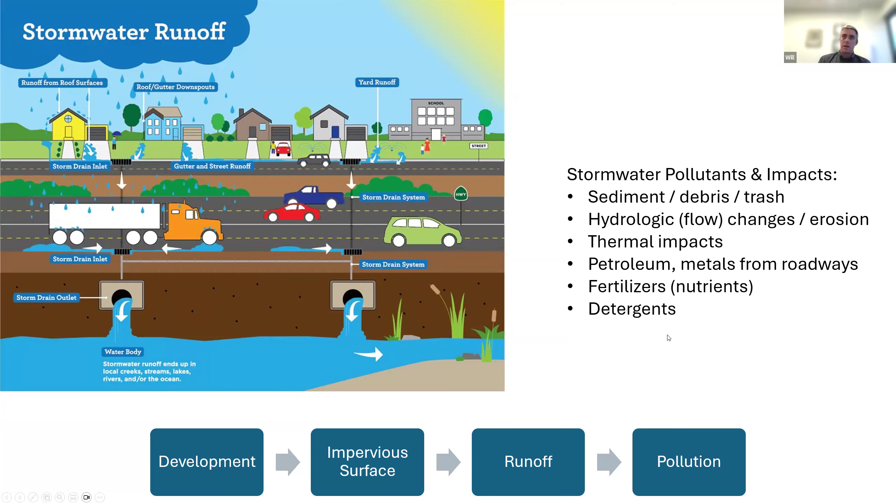So how is stormwater regulated? There's a lot of different ways that we regulate stormwater. So for example, industrial facilities are required to have permits for their stormwater discharges. They have to install things that are called stormwater best management practices, and they have to regularly sample the stormwater that's coming off their site to make sure that it is not polluted and clean enough to go into a stream. Permits are also required for municipal separate storm sewer systems, or MS4s.

We also regulate stormwater through development standards, right? So if you want to build something, a house or an apartment complex, there are standards that say you have to have this much setback from the property line. You have to have this much pervious surface on your lot. So you can't overdevelop and just pave an entire lot.

There are also permits required for earth disturbance activities. So think like grading, or large construction projects. There are things you have to do to keep the sediment, primarily the sediment, from running off the site during construction. And then finally, there's post-construction stormwater management planning. So, what have you engineered in your structure to handle and convey the stormwater to the sewer system in a way that's not going to result in flooding or increased runoff or stormwater pollution. So that's a few examples.

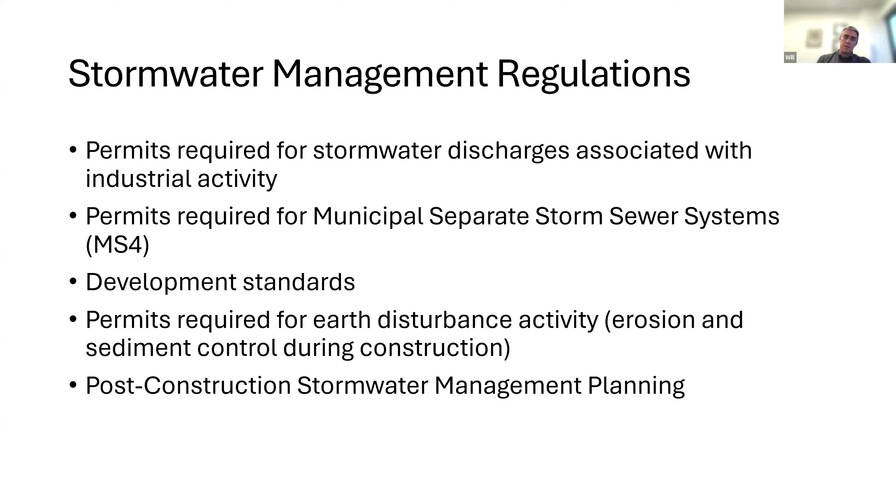At the end of last year, the township updated their stormwater ordinance. And so I wanted to highlight a couple of things that the township has done to try to address the issue of stormwater pollution. So one of the changes in the ordinance is they have lowered the threshold for regulated impervious areas from 1,000 square feet to 500 square feet. So what that means is if you are proposing a new deck or a new driveway or a new addition on your home, if it's over 500 square feet, then that is now going to trigger the stormwater management planning and review process with the township engineer.

And we're going to have another workshop next week on Tuesday where we are going to talk in more detail about that process. It sounds complicated, but there are some easier ways to go through that process that we'll talk about.

Another change in the ordinance is that threshold that triggers plan review is now cumulative, going back to February of 2005. So it used to be the case, it was kind of this weird loophole situation where you could add 900 square feet each year, but as long as you didn't trigger that 1,000 square foot threshold, you would never trigger any kind of stormwater management planning or review. So you could kind of keep incrementally adding impervious area to your property. And that's been addressed in the ordinance update.

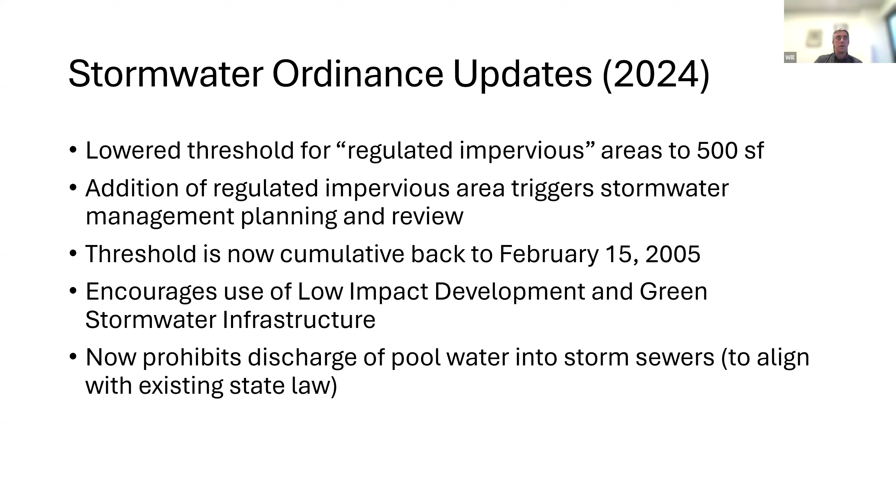So now we'll get into things that you can do at home to help the issue, right? So the first strategy that you want to think about is reducing the impervious surface at your property. And this will also help you. Me and my wife, we're planning on putting a sunroom on our house. It's an older home where there's not a lot of impervious area left on our property to develop. So some of these strategies I'm looking at to try to get some of that impervious surface back, right? So potentially we could have a slightly larger sunroom in the future, hopefully.

So one thing that is out there now that you can use are permeable pavers, right? So this is a pavement system that is engineered to allow rainwater to infiltrate through the cracks. You can see there's little gaps between the pavers, and the sub base there, the pea gravel and the crushed stone, is designed to allow that water to infiltrate into the soil. Otherwise, it would just run straight off the driveway out into the street and into the storm sewer system. There's a lot of different designs that are available. The upfront installation costs can be a little high, but they do last a good bit of time.

So if you're looking at your driveway and you think maybe it's coming up on replacement, or it might need to be replaced soon, or sidewalks or patios at your house, this is something that you should consider, because it would significantly reduce the runoff coming off of your home. And if you want to make sure that the pavement system that you're looking at is not going to count as impervious area when the township looks at your plan, you should work with the township engineer to make sure you're ordering the right stuff and it's being designed and installed in a way that is going to give you credit for that, right? That this should all be treated as pervious area, not impervious area.

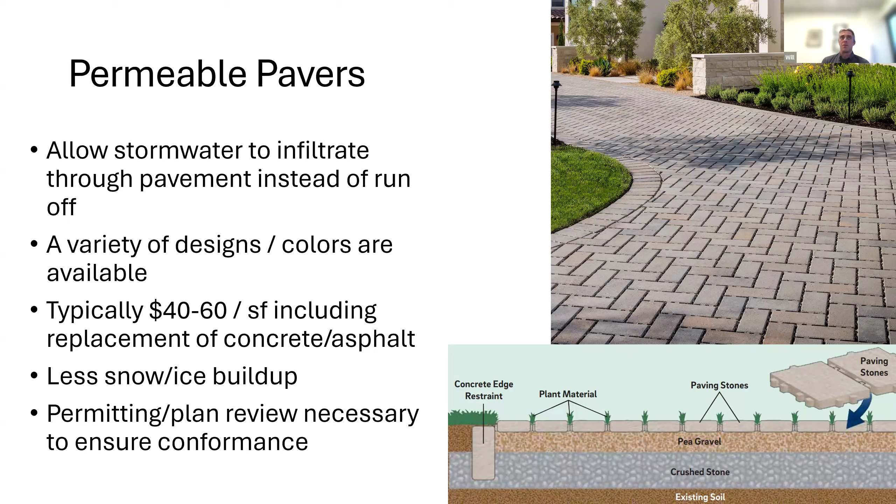There's also permeable pavement out there, porous concrete and porous asphalt. This is a little bit cheaper than the paver systems that we just looked at, but it requires some more maintenance. They're a little bit more susceptible to the freeze-thaw cycles, and you generally don't want to put road salt on these because it can tend to clog up the pore spacing.

So I've seen mixed success with this stuff. If you take care of it and you keep it clean, then it works great, and it will continue to work great long into the future. But if you have a lot of leaf clutter and debris and stuff that falls on your driveway or on your pavement, maybe not the best choice. Although it is cheaper to install than the permeable pavers, generally.

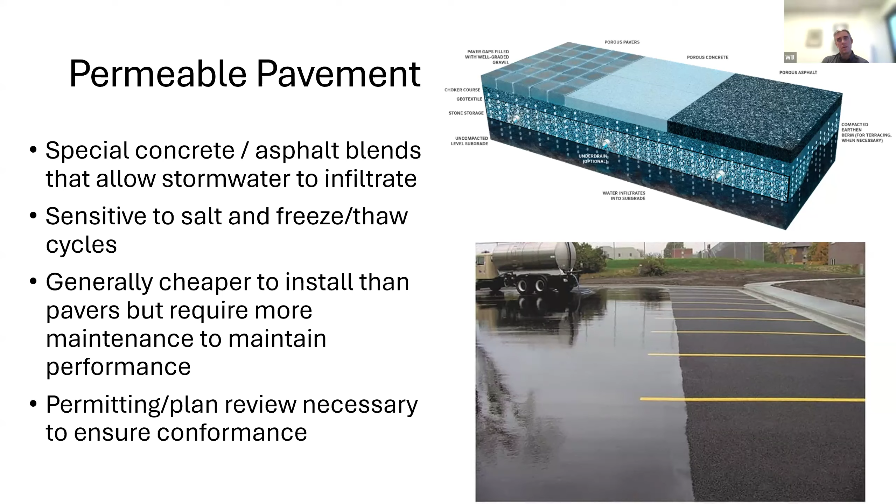Downspout disconnection. So this is something that is actually a requirement in the stormwater ordinance now, but we know a lot of homes have their downspouts directly connected to the sewer system. When I bought my home a couple years ago, all the downspouts were connected. So one of the first things I did was disconnect those. You just get one of those flexible plastic tubes at Home Depot or whatever, and send the water into the grass or a place where it can just soak into the ground.

They're not allowed to be connected to the standpipes, and they're not allowed to discharge directly to the street either. So they should be disconnected. Although if you have a smaller lot, or this isn't really feasible for whatever reason on your property, the township will allow exceptions on a case-by-case basis. Going back to the downspouts, this is a really simple and easy way to significantly reduce the runoff from your property, because the roof is a pretty significant portion of the impervious area on your lot. And this is really cheap to do.

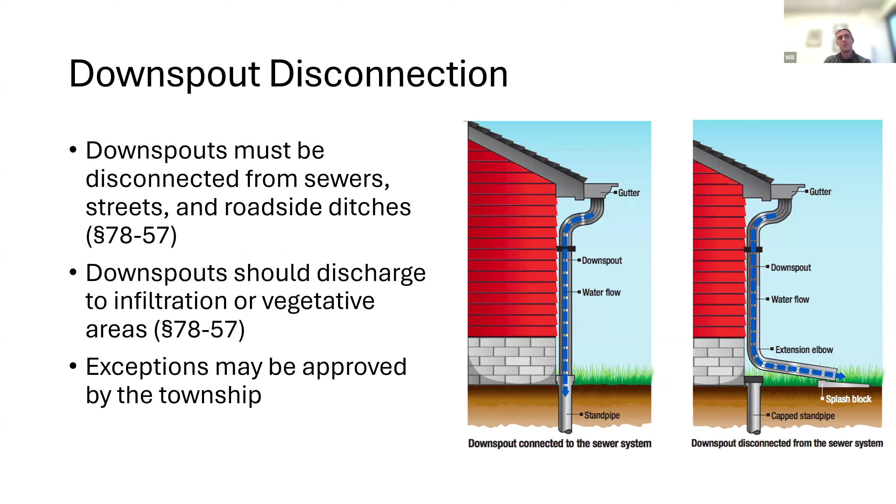Depaving, right? So at my house, we have an asphalt driveway, and we have these concrete sidewalks and walkways that go around in our backyard. I'm not really sure why they're there or who put them there, but it's something that I'm looking at getting rid of. Again, I'm trying to reduce the impervious area on my lot, not only for stormwater pollution reasons, but also because it may allow us to have a sunroom in the future.

So I've seen these ribbon driveways in my neighborhood. I think they look really nice, and you could do that in conjunction with a permeable paver system. But that little strip in the center there, that's a couple hundred square feet that you can reclaim. Again, sidewalks, do you really need them? Are they too wide? Same thing with patios.

Another example at my house is we have a deck, but underneath the deck is concrete pavement, right? So I'm not sure why that concrete is there, but that means whatever water falls through the deck just goes onto the concrete and runs into my driveway. So these are just things that I've noticed that I'm looking at ripping up and getting rid of. And all that square footage can add up pretty quickly.

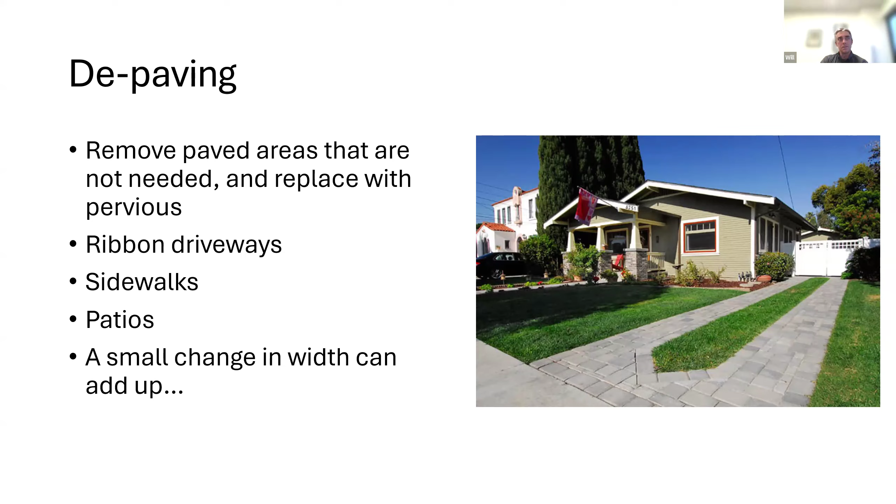The other method that we have, in addition to just reducing impervious areas, is capturing or at least slowing down that stormwater, right? Because we talked about that first flush, that really quick, rapid flow of water. That's where 90% or more of the stormwater pollution comes from, in the first 30 minutes or first hour of the rainstorm. So if you can contain some of that water and do something with it, or at least slow it down, that can have a big impact as well.

So here's some methods that you could do at home. You could get rain barrels, right? These are connected to your downspouts, and they're very simple, very cheap to install. And now you have a barrel of water there that you can use for watering your garden or cleaning your patio or whatever you want. They do require a little bit of maintenance. You want to keep leaves and other stuff from accumulating in there. You want to keep them empty, obviously, because if they're full, they're not going to hold any additional stormwater when the next rainstorm comes.

But if you're interested in this, we're having a rain barrel workshop on June 17th at 6 p.m. at the CREC. And the first 25 people that sign up for that will get a subsidized rain barrel for their home. And we're going to teach you all about how to install and maintain them at that workshop.

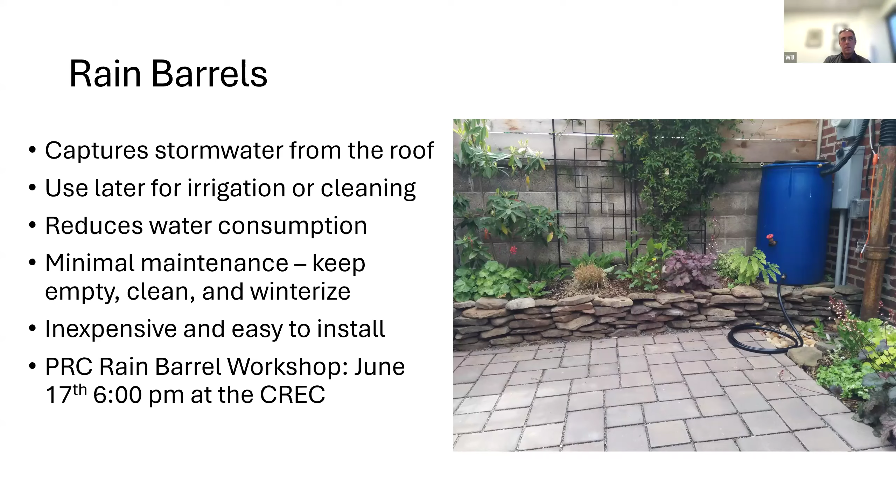Downspout planter. So this is similar to a rain barrel, except it's got an underflow and overflow drain in it and a little bit of soil and drainage layer at the bottom. And you can just grow your flowers or whatever you want in there. It's just a nice little piece.

You generally want to use native, perennial and drought tolerant plants. That would be the easiest to maintain. They can just kind of live in there with the periodic stormwater. It doesn't require a lot of work. But the benefit here is that whatever rainwater is captured in there is sort of treated and filtered by the soil and the plant system. And some of it is taken up by the plant and then evaporated and transpired back into the atmosphere, instead of running down your driveway into the sewer.

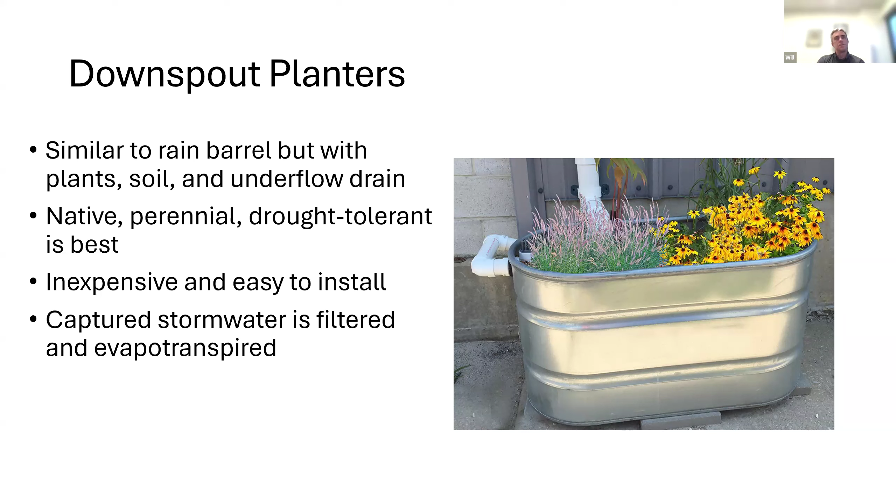Just planting more trees and planting other vegetation helps a lot too, right? Because these plants, as their root systems develop, help to promote a deeper, more rapid infiltration of water into the ground. They also retain a lot of water. Obviously, plants need a lot of water to live, and so they take the water up from the ground and put it back into the air. And all of those things reduce the amount of runoff that's coming off your property.

And mulch and compost are also good ways to help retain some of that moisture on the ground, where it can be used by plants and where it's not just wasted and sent down the drain.

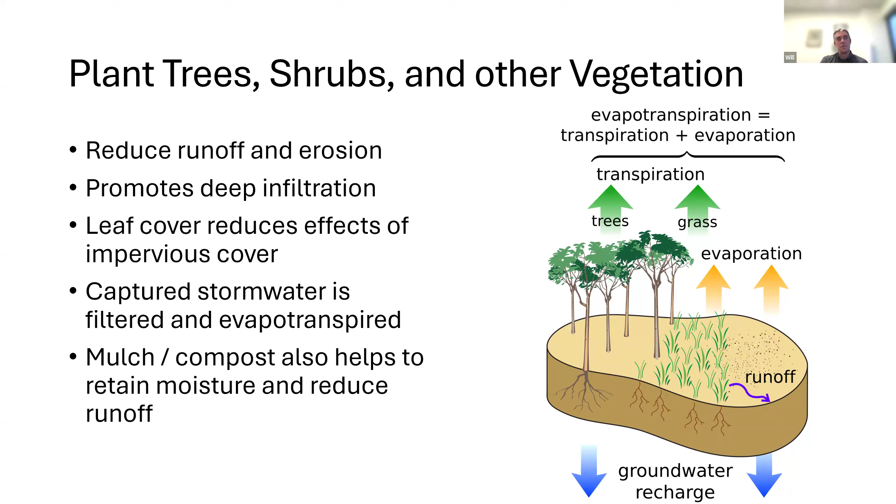Rain gardens. So we have our resident rain garden expert, Peter Puglionisi, with us here. And there is a program in the township called Hav-a-Rain Garden. So Peter, I'm going to play your cool time-lapse video here, and maybe you can talk a little bit about Hav-a-Rain Garden and how folks can get signed up.

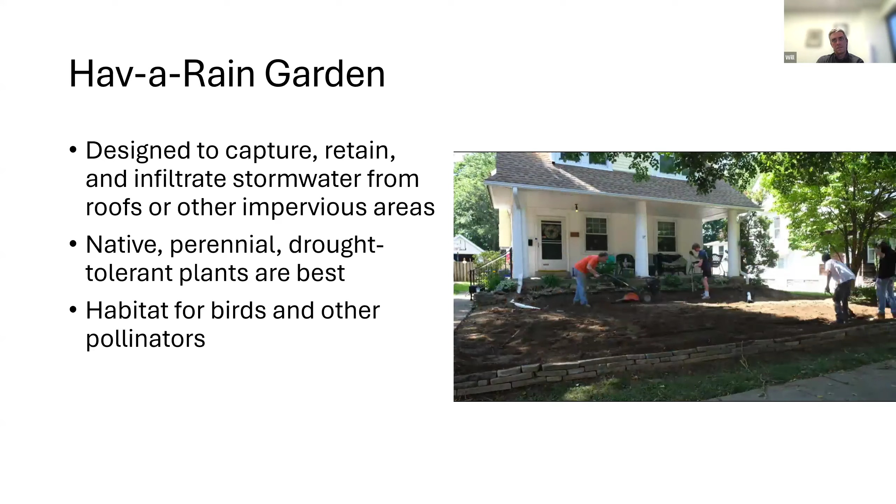Sure. So Hav-a-Rain Garden was created probably 11 years ago. This is the 11th year that we've been building rain gardens. We built 10 rain gardens a year for 10 years. We're on year 11 now. And we are, I guess, 2 rain gardens down, 3 to go for the spring, and we'll do another 5 in the fall.

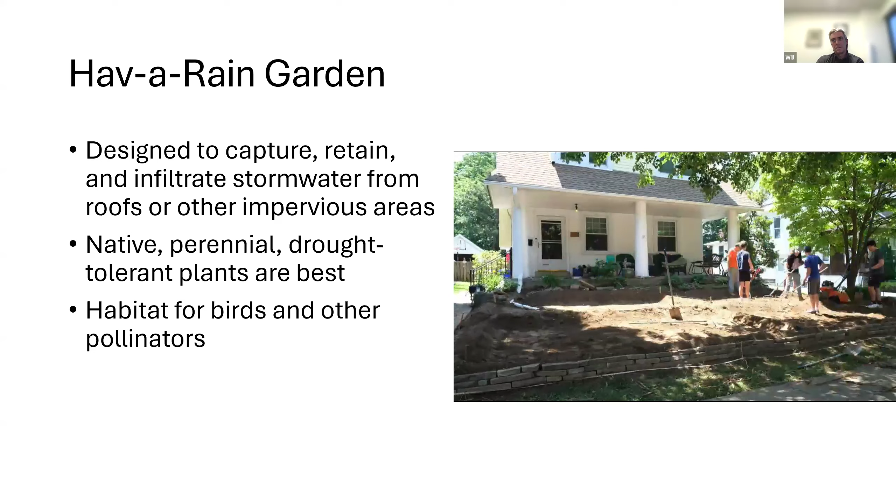And if you are interested in a rain garden, we do assessments, and because we do it at either no or low cost to the homeowner, depending on the option that they choose for how much work they have to do, we can only do so many. So probably about a third of the homes that we assess wind up getting one of our rain gardens, based on all kinds of factors, feasibility.

We're also looking to maximize the bang for the buck, the visibility, the education value, meaning how much water is currently being discharged to the storm system that we can divert into a rain garden and infiltrate and slowly release into the ground. So we have a whole set of criteria that we do that with.

So this shows you could take out most or all of your front lawn and replace it with a rain garden. And these are generally designed to hold the first couple of inches, at least that first flush of rainwater from a heavy rain, or all of the water from most of the rains.

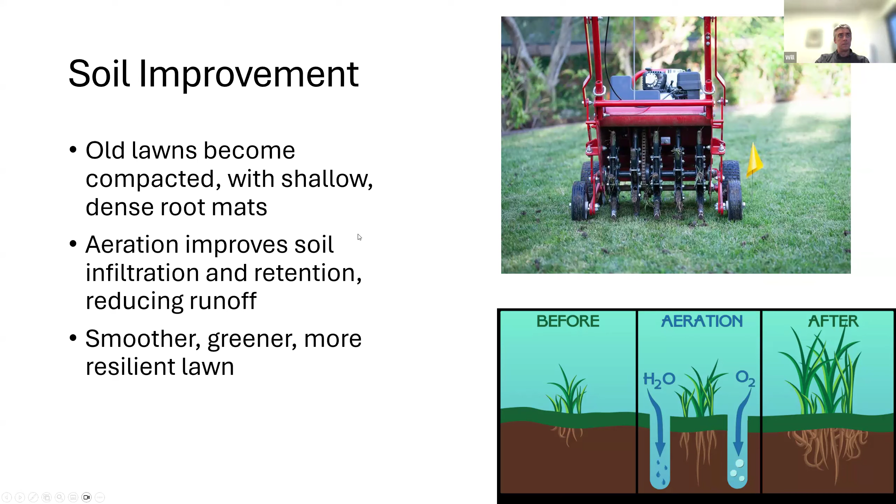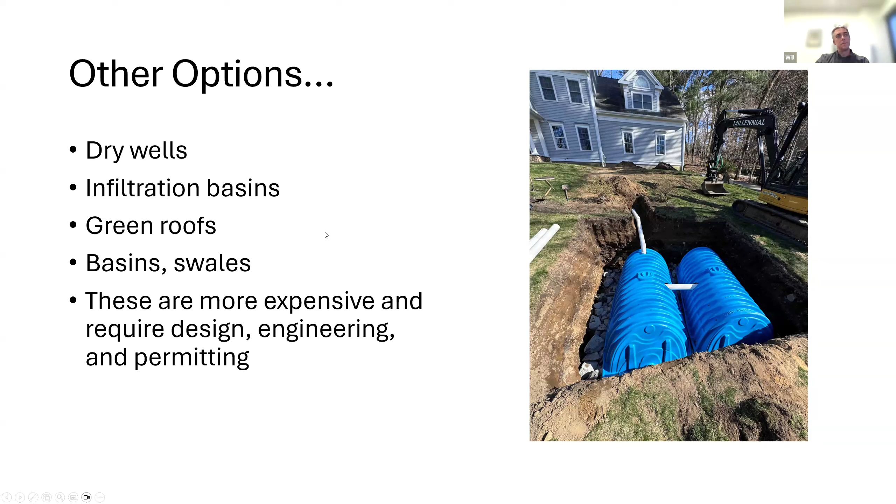And so that is my presentation, but happy to discuss further or answer any questions or any thoughts that anybody has. Well, I'll throw in my 2 cents while the other attendees are warming up to the idea of floating a question.

So one of the slides that Will showed was the strips. And in Havertown, the old school way of doing it is 2 concrete strips. And there's a lot of value, I think, in leaving them in place like that. I actually saw a family who got a rain garden, who had just replaced their old concrete strips with new concrete strips. So you don't have to blacktop an old driveway and create even more impervious surface. So I just wanted to throw that out.

I think they look nice personally. I have one myself. It's actually a little strange and bumpy and a little cracked, but years ago in the 70s, the prior owner of the house filled it in with old bricks and created an old brick walkway. And it does hold water and infiltrate the water. And I like it. It's got character.